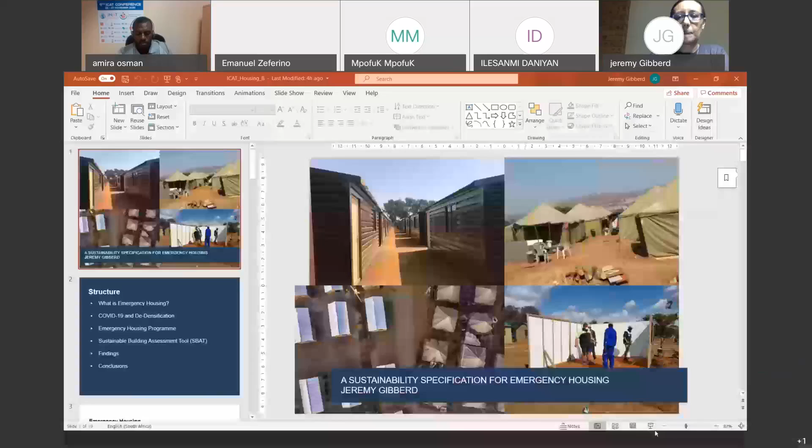Jeremy is muted, so we also need to unmute Jeremy. Jeremy, may I ask, you are presenter, you should be able to unmute yourself when you want to speak. Okay, so Jeremy, please unmute yourself. Apparently you can do that. And then for each of the speakers, please give us a bit of a background to yourself before you start. Okay, thank you. Can you hear me? Very clearly. Okay, and can you see the screen? Yes, we can. You can put it, you can, sorry, you can play your slides or put it on full screen. Wonderful, that's excellent. Okay, thank you.

My name's Jeremy Gibberd, and I'm an architect and have done work in sustainable built environments. So what I'm going to cover in the first paper is really a specification for emergency housing. It's quite a hot topic at the moment with the COVID pandemic.

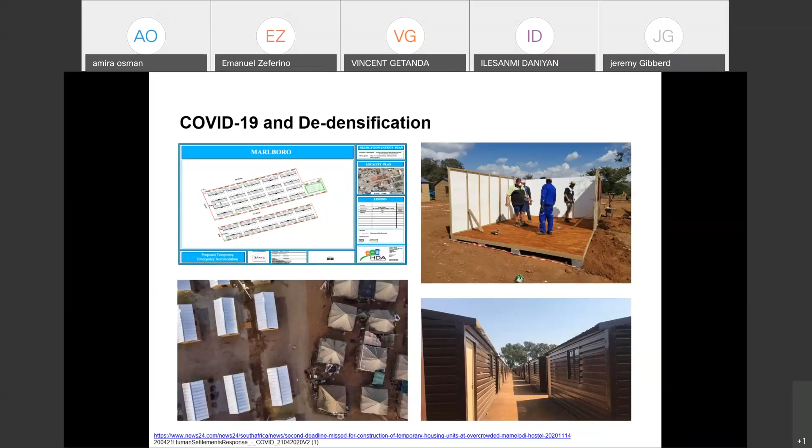They often consist of either tents or timber structures, and they are meant to be fairly rapid. They're meant to have been constructed in a month or two months. A number of them are still going on currently.

What is interesting is really the kind of response that has happened from a number of different areas. These are some of the points that have come through from NGOs, think tanks within the area, really saying that de-densification may not work. There's a number of issues in terms of people reoccupying the space that's been released. Also a major issue is that if you move people from where they're linked into other people, work opportunities, social cohesion, that can lead to a worse situation.

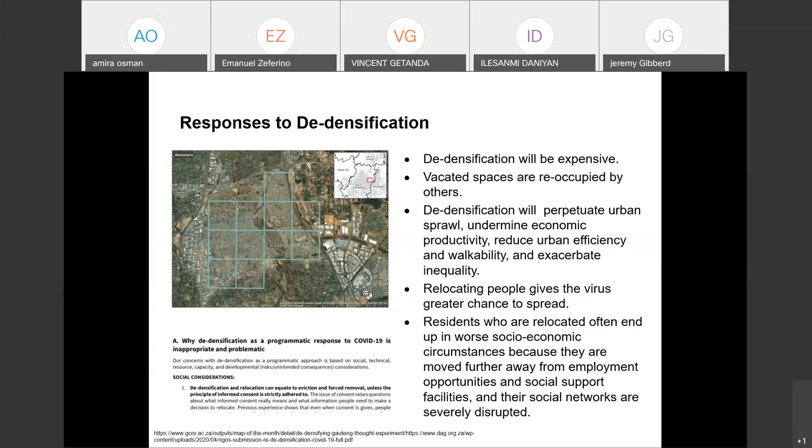And really that's one of the things that this paper looks at. So I'm not going to go into the detail, you can read the paper, but the emergency housing program is part 3 of the housing code, developed in 2009, so it's about 10, 11 years old. And it talks really about what are the types of provision that should be allowed for emergency housing.

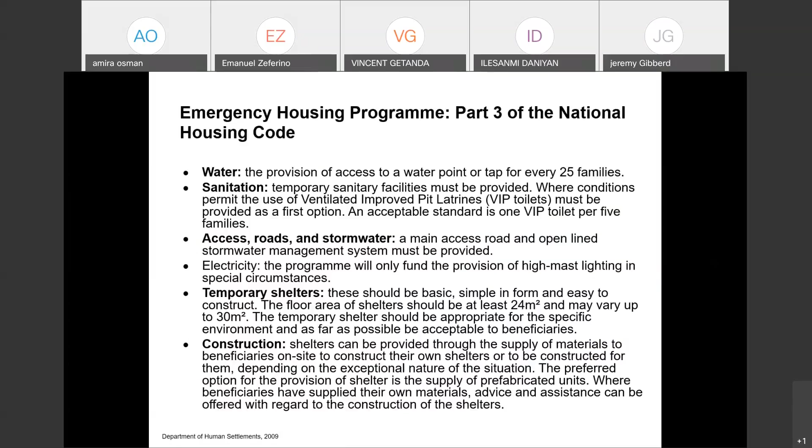So it covers things like water, sanitation, access, temporary shelters, construction, what the roof covering should be, the side coverings, footings, floorings, thermal efficiency, settlement densities. And it's not very detailed. I mean, you can see thermal efficiency, it's fairly generic, it doesn't get into quantitative detail. There's very limited performance specifications.

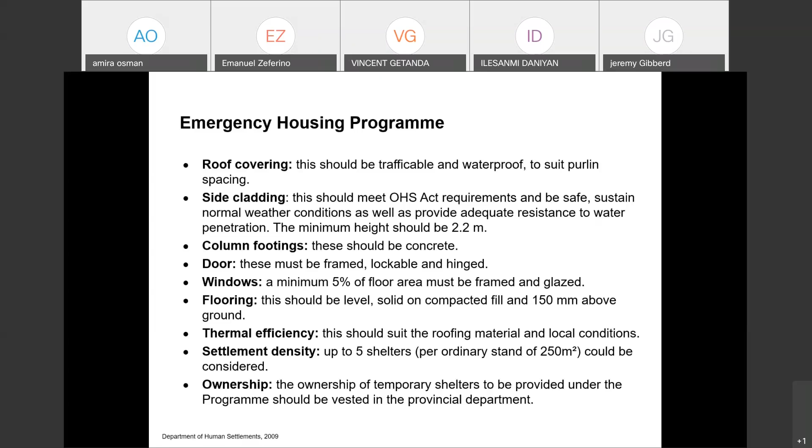And the danger with that, obviously, is you then go to the absolute minimum. And that's, I think, why some of the current programs have been criticized - the criticisms have been that they are going too low, that they are not really places that people would want to live in for up to 2-3 years.

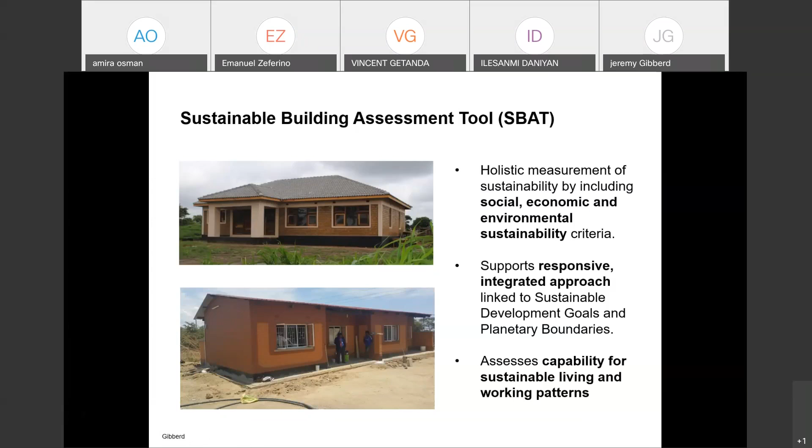So moving on, the tool that I used really to evaluate that provision is the SBAT, which is a tool I developed a number of years ago. And it's been used quite widely in a number of different projects to evaluate housing. So these particular examples are from Zambia. And it's been fairly instrumental in trying to really look at the sustainability in terms of things like local economy, local content, etc.

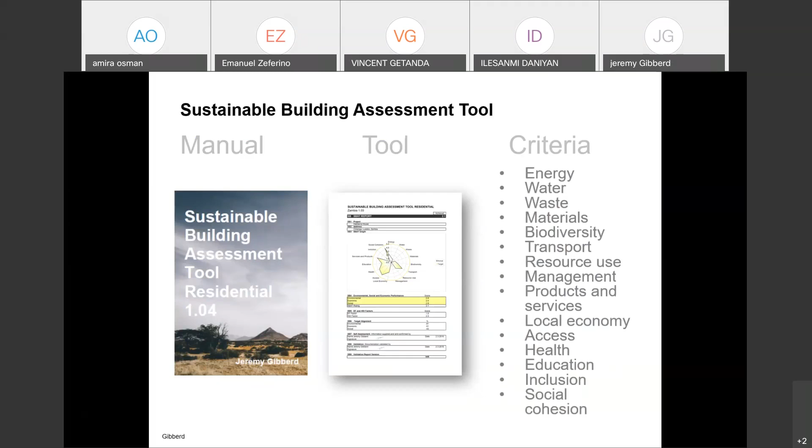And the way it works is that there's a set of criteria - 15 criteria, 5 environmental, 5 social, 5 economic - and you measure housing performance against that, and you get a web diagram and a score out of 5. So you have a good representative, quantitative measure of the performance of the design or the actual finished building.

So when I applied the SBAT, there's quite a lot of detail. Again, in the paper, I'm not going to go through a lot of this, but what comes through very strongly is that the current specifications are very limited in detail. So they don't really address the issue of what happens in the building in terms of energy.

And obviously, if there's a family there that's living 2 or 3 years, how do they cook? How do they light the building? The same thing for water and washing - what happens, where are the washing areas, how does that happen? Waste, there's no mention of that.

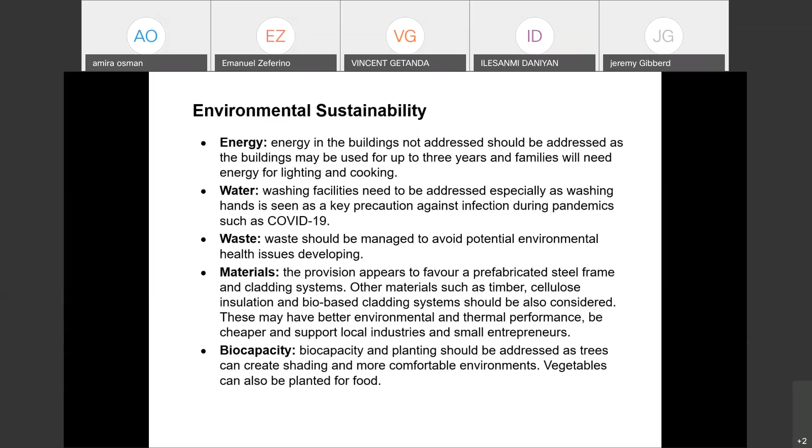Materials, again, it talks about a prefabricated steel frame. Increasingly, there are a whole range of other building technologies that could be used. And biocapacity, there's no kind of mention about how you make the site more comfortable in terms of environmental issues.

So economic sustainability, again, the location really isn't addressed. And what the research shows is that it's very important to link emergency housing with the existing and previous communities so that the links are still strong. People can work where they worked before. And how you address local economy so that perhaps the building of those structures could be done by people within that community or the displaced people, so there's some way of earning a bit of revenue and really getting back on your feet.

Social sustainability, again, one of the key issues here is that the provision doesn't really mention a lot of the kind of social infrastructure that you'd expect in a community - things like health, education, social cohesion. So again, it's important, I think, to address that so that you don't get the situation where you move people 50 kilometers from a lot of the networks and support that they used to have, and records, etc.

So basically what the paper then does is it says, given that situation, what are the aspects that could be modified or added to in terms of a specification.

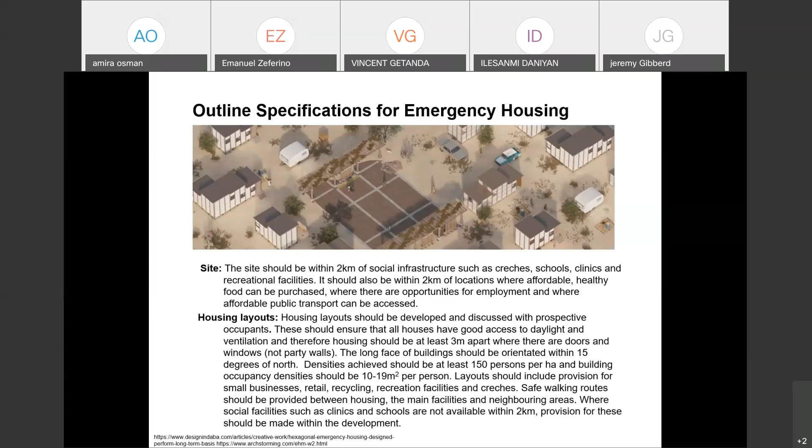So there's some detail in the paper around where the site is, layouts, detail on water, sanitation, electricity, what's a simple, workable, sustainable electricity system for emergency housing so that life can carry on, children can study at night, etc. A little bit on the detail, and there's some very interesting examples.

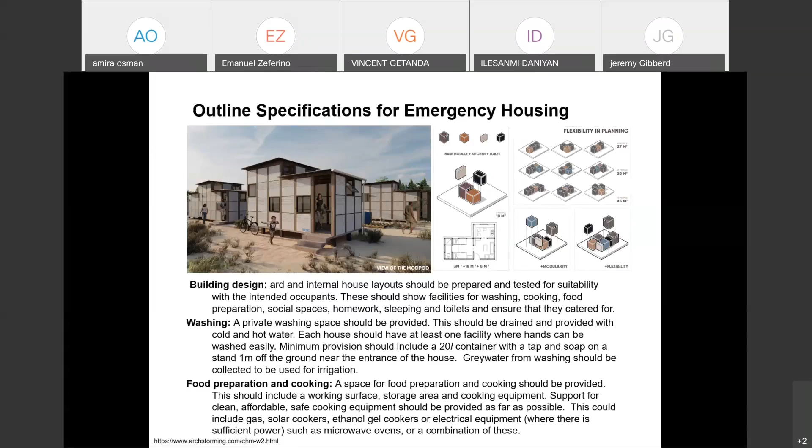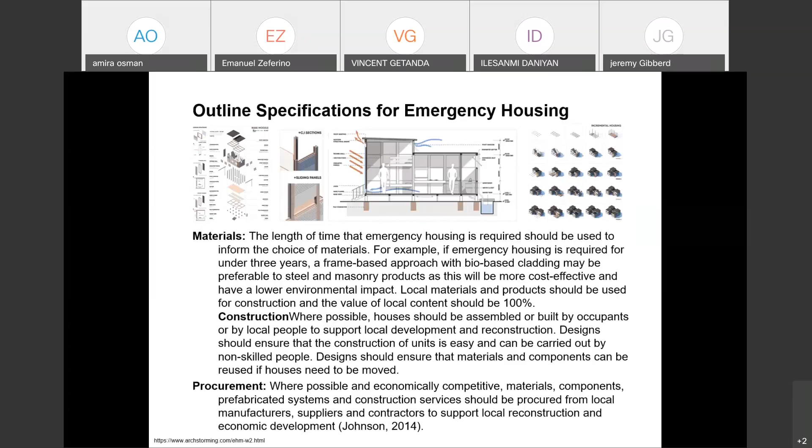So again, the specification goes into a little bit of detail for that - the types of materials, the construction. Increasingly there's some very good bio-based materials that have very low embodied energy, can be produced locally, can create new entrepreneurs, new jobs. And looking at procurement - how do you procure locally so that you support the local economy and enterprises that have been impacted by the particular issue that has displaced people.

So really coming to the end so that there's a bit of time for questions and discussion. So basically what the study does is it reviews the existing provisions for emergency housing in the Department of Human Settlements.

And those provisions are fairly minimal. I think if there was a lot of capacity in provinces and in municipalities, that wouldn't be so bad, because they may have their own locally developed versions which they could then implement. The thing is that isn't the case in many municipalities and provincial departments - they tend to use the overarching specifications, and there's not much time really to put together new tenders, new specifications, good layouts, etc.

So the argument this paper makes is that we need to put together more detail. We need to supplement the existing, and we need to update the existing so that we really address how people live in emergency housing and how can we make sure that it's as sustainable as possible. And that really is the purpose of one of the outputs, which is the outline specifications for emergency housing, and I think it presents a reasonable start.

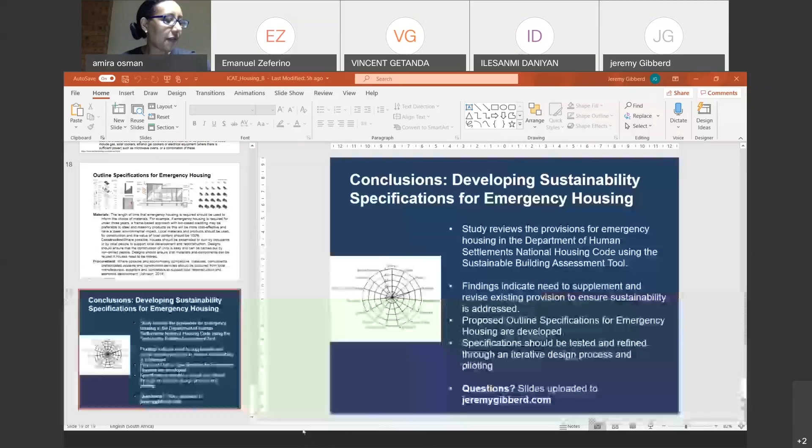This issue of de-densification - for myself, as someone that has advocated for and very much been an activist for density for a lot of my career, this discussion about de-densification since COVID started, I haven't quite known how to go about addressing that. So this is a very interesting topic you're working on. But also, what you refer to as absolute minimum guidelines - these aren't really ensuring anything of quality or anything that would be viable in the long term. Perhaps you could tell us, is the intention that people would settle there for 2 or 3 years and then it develops into a proper settlement, or is the idea that they move on somewhere else?

Okay, thank you. I think we don't know, because there are settlements that you go and look at in all countries. There are places in the UK where people were meant to have been there 6 months, and 10 years later they're still there. And there are many in South Africa. So I think the issue is we don't really know.

But what we do know is that people that have been affected by a major disaster, something like flooding, it's very important that we enable them to put their lives back together and get going again. And I think what that means is there has to be some minimum standards that take into account how they live, how children go to school, where people work, how people cook, where they wash, etc. We can't just say, you know, there's a shed, you go and put your life together.

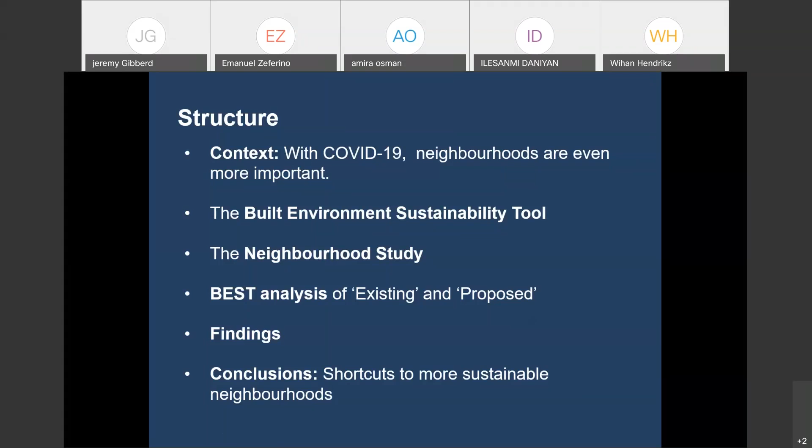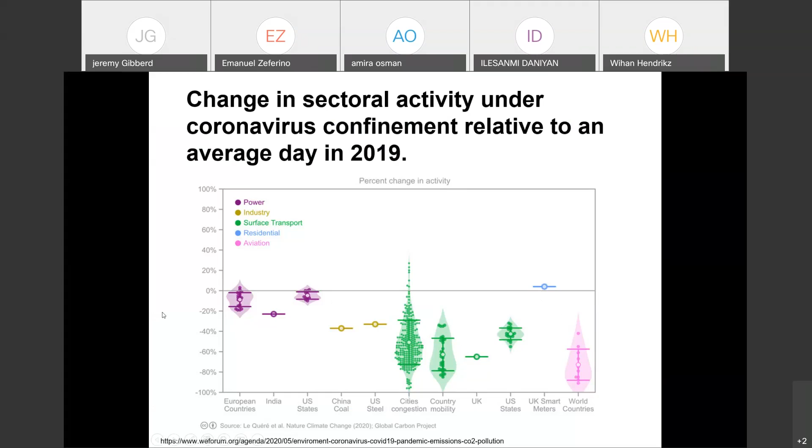First, an interesting issue from the pandemic is the reduction in carbon emissions. There's been a huge reduction in surface transport, aviation fuel, power consumption, etc. Because people stayed home and became more local, we actually have a far more efficient set of measures when we look at carbon emissions. It's very interesting data.

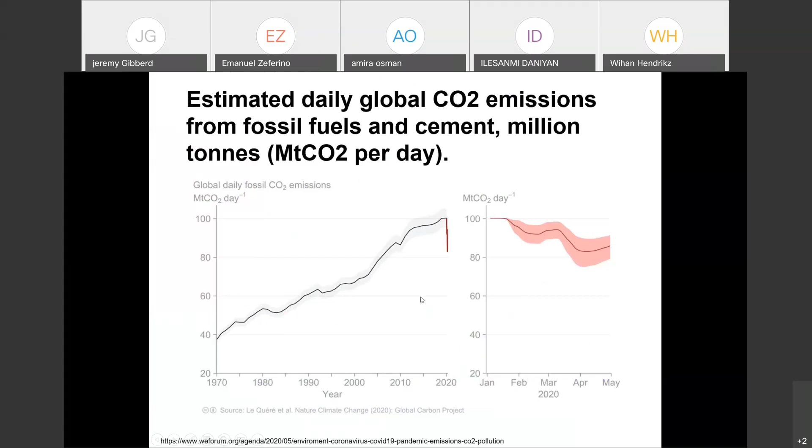You can see this clearly in global daily carbon emissions—that's where we were at the beginning of 2020, and we almost dropped 20%. That's a graph over the months, and what it shows is that it is possible. It makes a very strong argument for localization, local living, local working. That's really the essence of the paper.

Unfortunately, it also shows there's likely to be a major impact on poverty. There was good progress downward over the last 10 years, but the pandemic's effect is that it's likely to increase. There's a huge increase in pressure in terms of jobs, education, health, etc. So how do we address this at a neighborhood level?

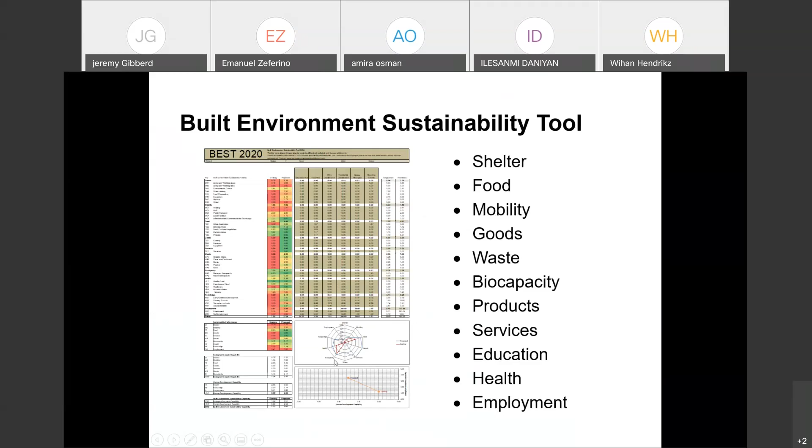The idea is you measure where you are, then define interventions to achieve full capability for sustainability—a neighborhood that is fully sustainable across these criteria would fill the whole chart. It's quite an interesting tool, and nicely, it's very well aligned with the SDGs—if you take the 17 SDGs and compare them to the tool's criteria, there's very strong alignment.

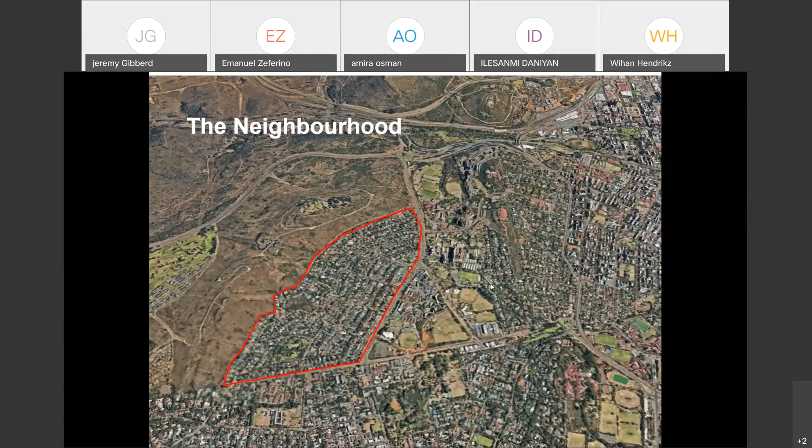The neighborhood, which many of you may recognize as I go through it, is outlined in red—fairly well defined, with hills on one side, a highway on two sides, and some social infrastructure around it. It's a fairly typical wealthy Pretoria neighborhood with quite large houses, swimming pools, etc. One corner has interesting commercial development—shops, restaurants, offices. You can see the corners and edges of the neighborhood becoming commercialized, with densification starting, more jobs and businesses being created because it's in a very good location.

The first exercise was to assess the neighborhood against these criteria based on current development types. Using the tool, we measured different areas and found insufficient density, limited renewable energy, limited passive environmental control, and limited provision for mobility—it's not a safe place to walk or cycle since there's no specific provision. There's also limited access to low ecological footprint products, and limited services.

So if you want to do things like banking, some types of banking, you've got to travel. Obviously there's the use of the internet, so there's some provision locally. In terms of employment density, it's low, not much support for local enterprises. There's no schools locally, no secondary schools, primary schools, etc. Health, there's some facilities for exercise, but very limited facilities for things like clinics.

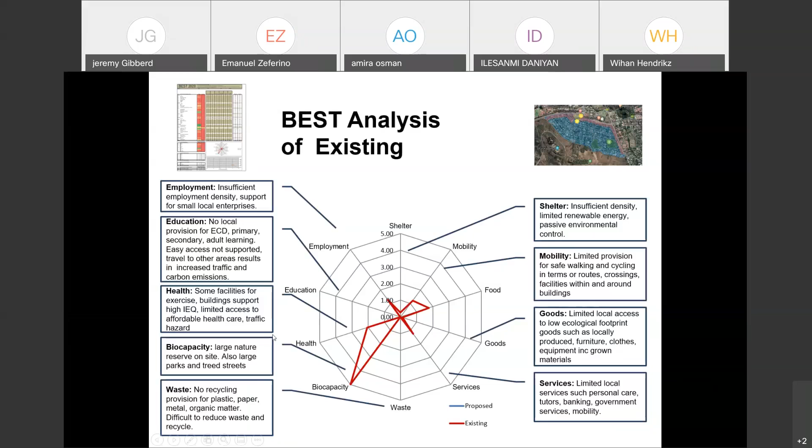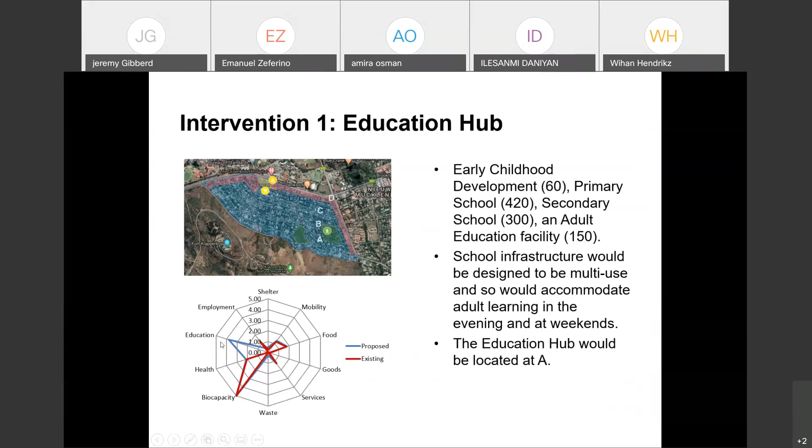And what we then proposed is 6 different interventions. We said, what if we put in an education hub with early childhood development, so a creche, a primary school, combined primary and secondary school, and a facility that could be used for adult education, making it multi-use so it could be used for lots of different facilities. And what you can see is that improved the score in that area, as you'd expect.

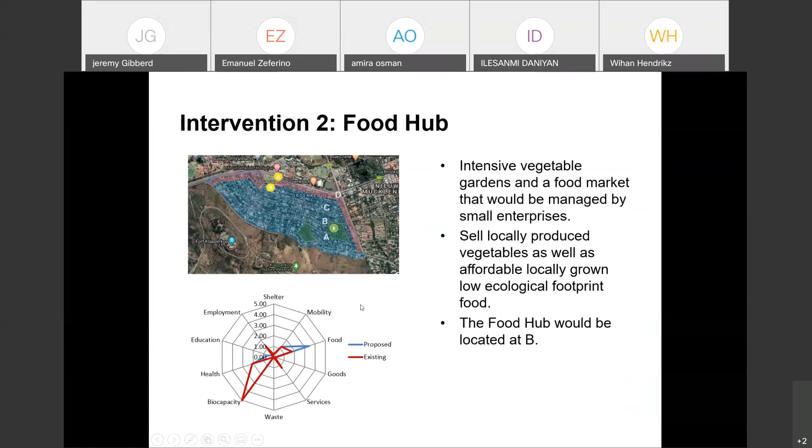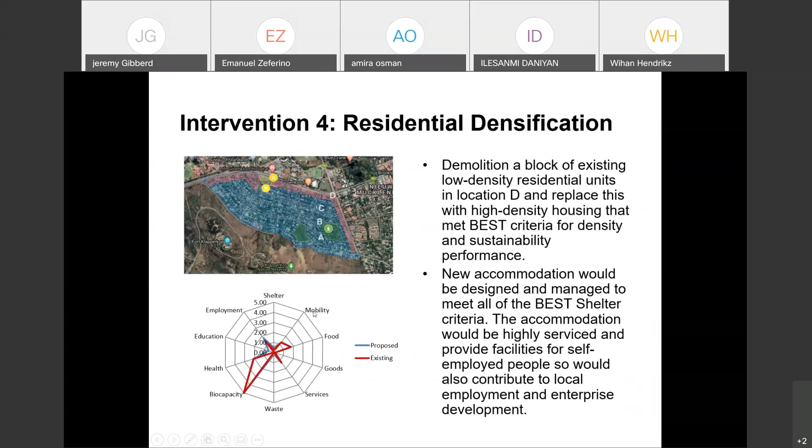Residential densification again took out a block of residential and increased the densities to meet sustainability density requirements. And again, some aspects were improved.

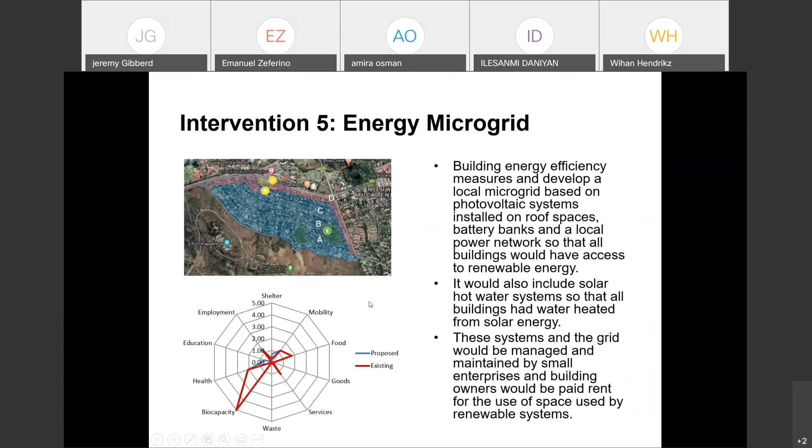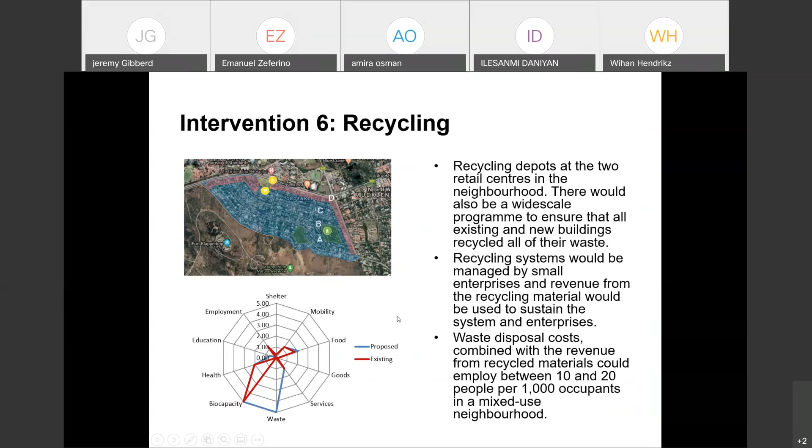Recycling - this was about setting up a local recycling scheme and recycling pretty much 100% of the waste on site, linking it up to recycling contractors. So again, as you'd expect, a major improvement in terms of waste.

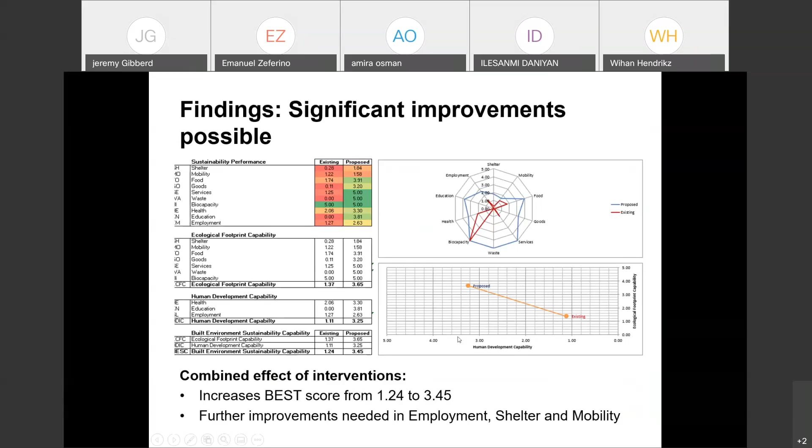If we put that all together, taking the 6 interventions, we'd improve the BEST score from 1.24, which was very low, up to about 3.45. We improve both ecological footprint, which is really the impacts in terms of consumption and production, and also human development capability - better access to jobs, better access to education, health. So the nature of these particular interventions seems to work quite well for both the social and economic.

Okay, I'm just about finished.

So just to summarize, so there's a bit of time for questions - what can we learn from this study? The findings suggest the following key issues. The first thing is that if we design interventions to really address everyday requirements - we need to access goods, we need to access services every day for normal life - and if we can create a lot of those locally, we have many knock-on advantages. We can create local economic activity, local employment, and reduce the requirement for travel, cars, carbon emissions.

The second one is that if we can think through how the development works, if we can proactively structure the development through conditional requirements - so we state that a development needs to include X and Y in order to meet and address a gap in that neighborhood - we can make a big difference quickly.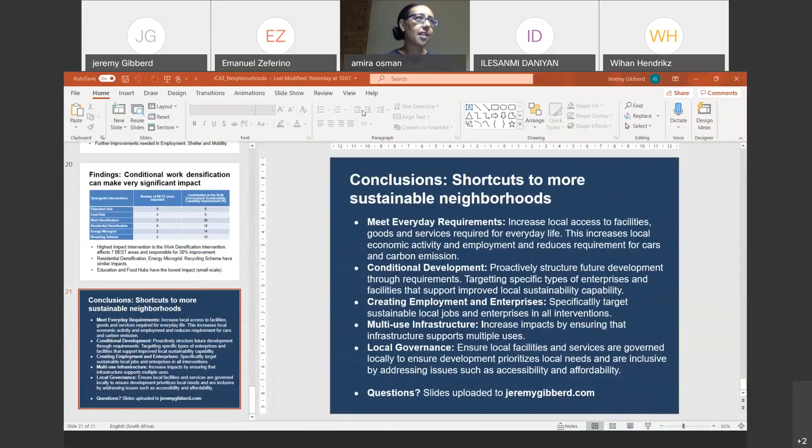I think that's it, thank you so much Jeremy. I really hate to interrupt anyone, especially when the topic interests me so much, so please forgive me for that. But for the other speakers, let's try to stick to the 12 minutes. I really enjoy what you're trying to do, Jeremy, taking concepts in policy documents, various agendas and so on, and making it measurable. I have some questions, but I'll keep them for the end. I see another question about the commercial viability and worldwide applications of this. Jeremy, I'm going to keep track of these questions, and I'll definitely be referring to this for my own work on spatial transformation, so I have a lot to say about it. But let's move on to our next speaker. Emanuel, if you can help our next speaker, we will get back to having a conversation at the end.

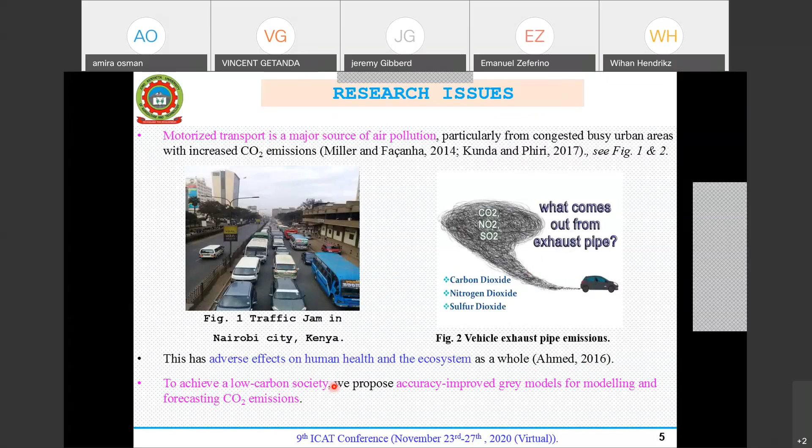Our research issues are: motorized transport is a major source of air pollution, as we can see from figure 1, which is traffic congestion in Nairobi City, Kenya, resulting in CO2 emission, as shown in figure 2. This has adverse effects on human health and the ecosystem as a whole, as given by Ahmed 2016. To achieve a low carbon society, we propose accuracy improved gray models for modeling and forecasting CO2 emissions.

Rationale and research theme. Our rationale is, as populations and economies of the world continue to grow, it is a challenge to handle CO2 emissions and global warming. This calls for modeling and forecasting of CO2 emission to generate high quality and accurate CO2 emission data for aiding planners to set policies and measures to mitigate environmental pollution.

Our aims include: first, to improve the accuracy of the original gray model by data grouping technique and modification of initial condition. Second, to model and forecast CO2 emission by these improved gray models.

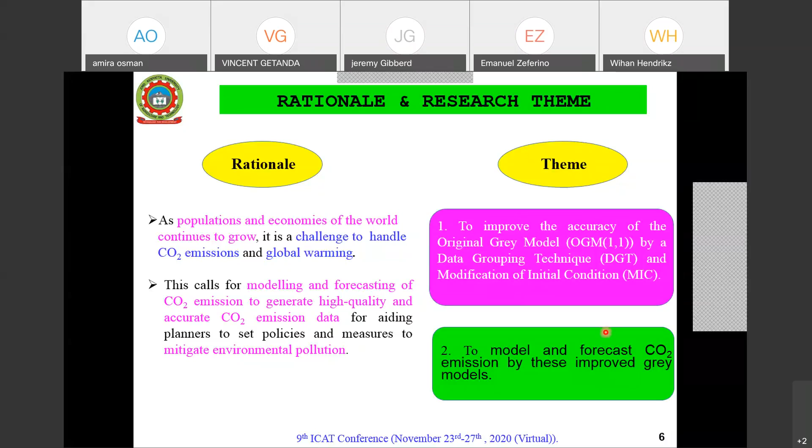Literature review. The gray system theory was introduced in 1982 by Deng, as given by Deng 1989. The term gray means poor, incomplete, and uncertain. It has been applied in various fields such as ecology, economy, among others, to analyze, estimate, forecast, and model gray systems.

GM's accuracy improvement in the past has been based on optimizing the initial condition, modification of the background value, as given by Madi and Mohammed 2017, and improved error as given by Jiang Jun et al. 2011.

In our research, we introduce a new approach, that is the data grouping technique, and compare it with optimization of the initial condition in improving GM's forecasting accuracy.

In the past, CO2 emissions has been predicted and forecasted based on multiple linear regression analysis as given by Lipao et al. 2017, and the co-integration approach by Lee et al. 2018, and autoregressive integrated moving average as given by Nyoni and Mutongi 2019. These methods are complex in their analysis and require huge amounts of data to forecast CO2 emissions.

Thus, we propose a simple and less data requiring approach in modeling and forecasting CO2 emissions. This is the GM, that's the gray model, whose accuracy is improved in this paper by data grouping technique and modified initial condition. Research purpose and approach.

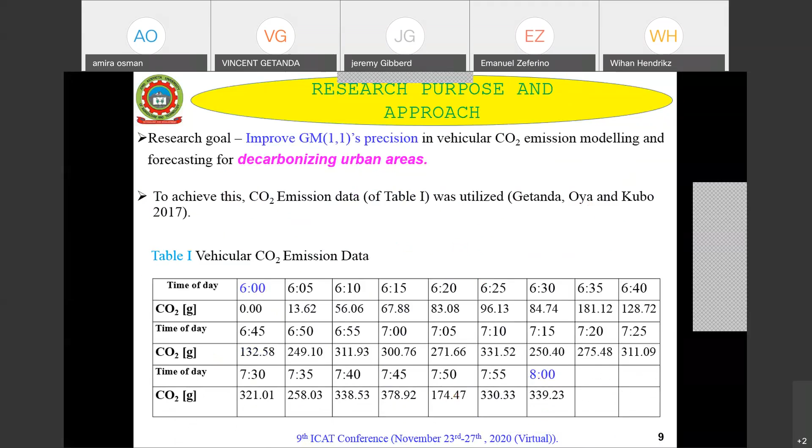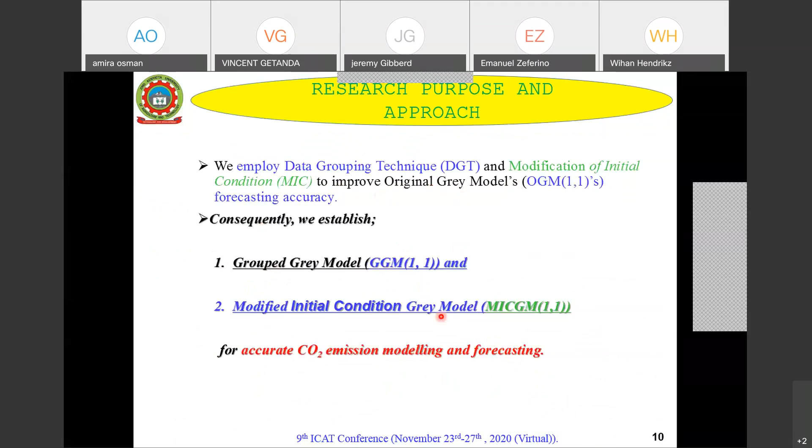And this is our Table 1, which consists of data from 6 a.m. to 8 a.m. of the day and a total of 25 data points. We employ data grouping technique and modification of the initial condition to improve the original gray model's forecasting accuracy. Consequently, we established grouped gray model denoted as GGM and modified initial condition gray model given as MIC-GM.

The gray model, let's review the gray model, is a single variable first order differential equation based on gray system theory, and it consists of accumulated generating operation, AGO, inverse accumulated generating operation, IAGO, and mean value generating operation, MGO.

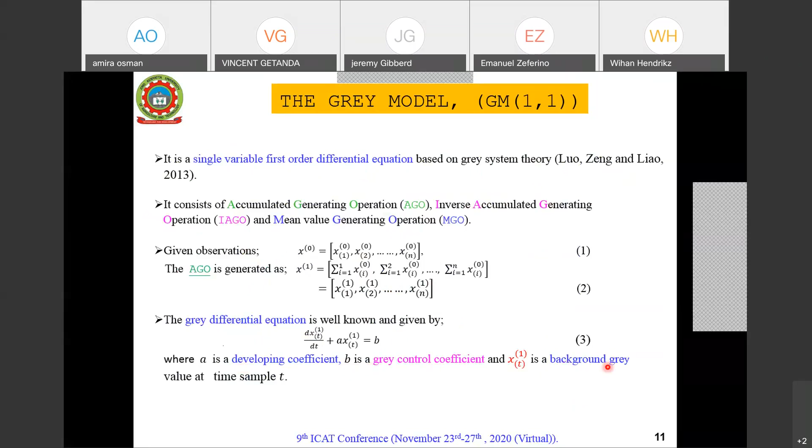For example, given observations as in equation 1, the AGO is generated by equation 2, and the gray differential equation is well known and given by equation 3, where A is developing coefficient, B is gray control coefficient, and X1 of T is background gray value at time sample T.

Equation 3 has a well-known solution given by equation 4. Therefore, the predicted value based on AGO series is given by equation 5.

From equation 5, the IAGO is generated as in equation 6, where x hat 0 of k plus 1 is the predicted value of x0 of equation 1. And from equations 1 and 2, we have the gray differential model given by equation 7.

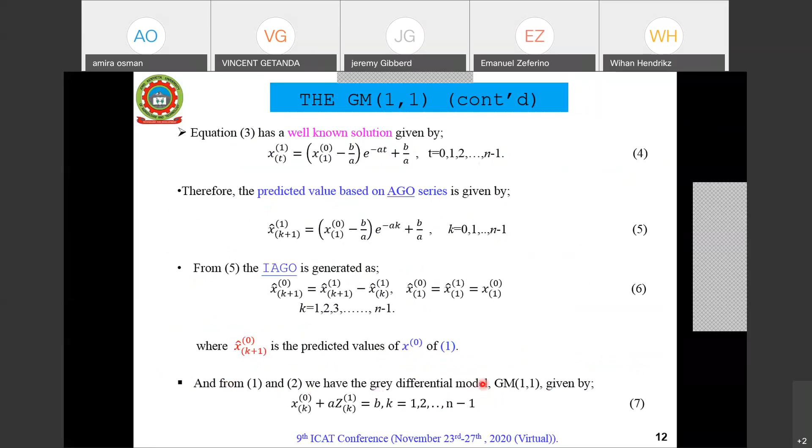Now, our proposed techniques for improving the gray model's precision. First, we proposed the data grouping technique, and in this paper we adopted the strong grouping technique because it is the most accurate technique, as given by Getanda, Oya, and Kubo 2017.

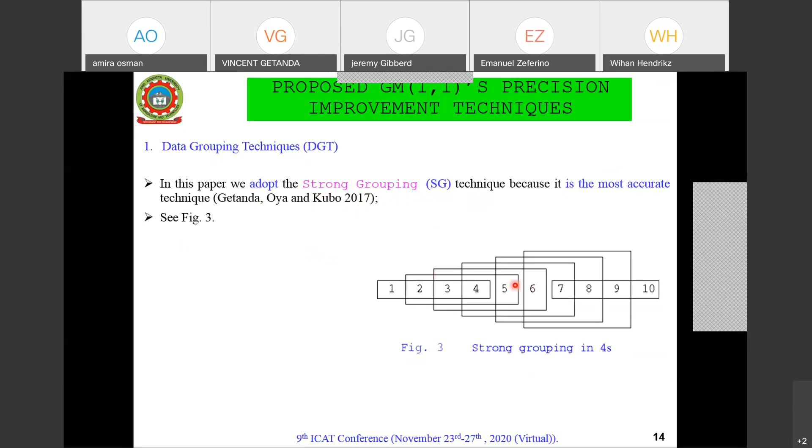As shown in figure 3, we show how we group 10 data points in groups of 4, and as we have just said, grouping in 4s is the most accurate grouping.

Secondly, we use the modification of the initial condition, as given in Madhi and Mohamed 2017. From equation 6, the restored value of the original gray model sequence can be given by equation 11. And substituting equation 5 in 11, we obtain equation 12.

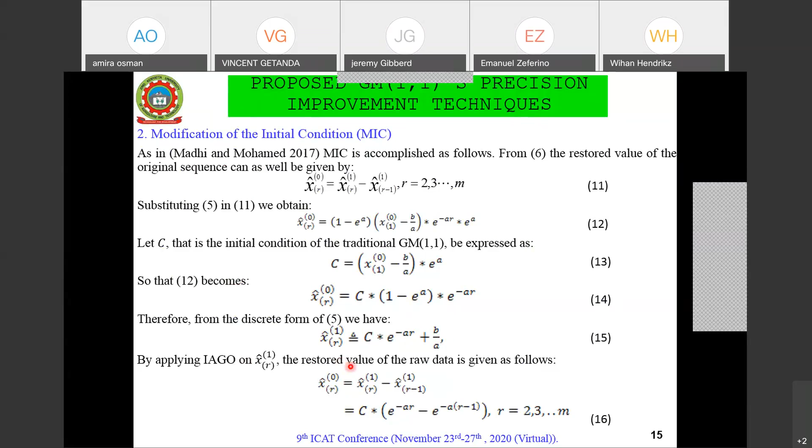Letting C, the initial condition of the original gray model, be expressed by equation 13, equation 12 becomes equation 14, and therefore from the discrete form of equation 5 we have equation 15. By applying IAGO equation 15, the restored value of the raw data is given by equation 16.

Minimizing the sum of the squared error from the predicted, that is the restored values, we can optimize the initial condition. Therefore, a function C is constructed as in equation 17. Substituting equation 16 in 17 and differentiating it with respect to C, letting the derivative equal 0, the optimized C is given by equation 18.

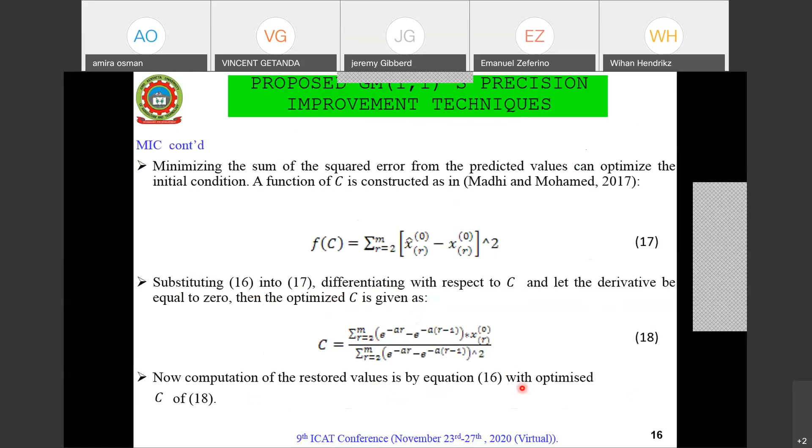Now, computation of the restored values is by equation 16 with optimized C of equation 18. Measuring accuracy improvement: we measured our accuracy improvement in the GM's model by mean absolute error and mean absolute percentage deviation, error indicators given by equations 19 and 20.

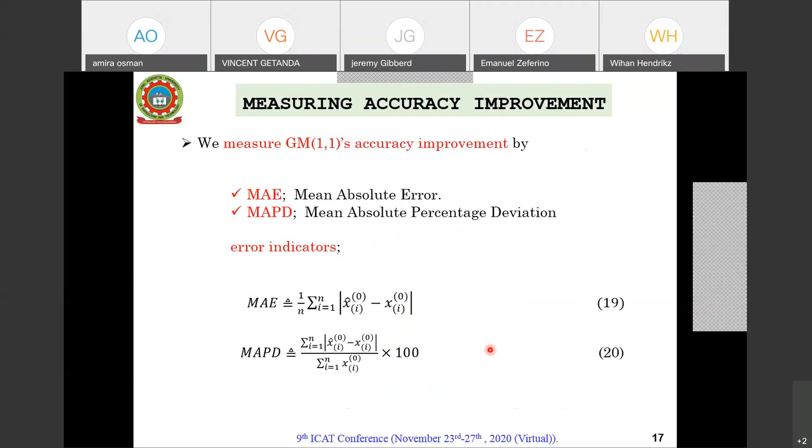Modeling and forecasting data sets. We subdivided the CO2 emissions data of table 1 into a modeling data set for estimating.

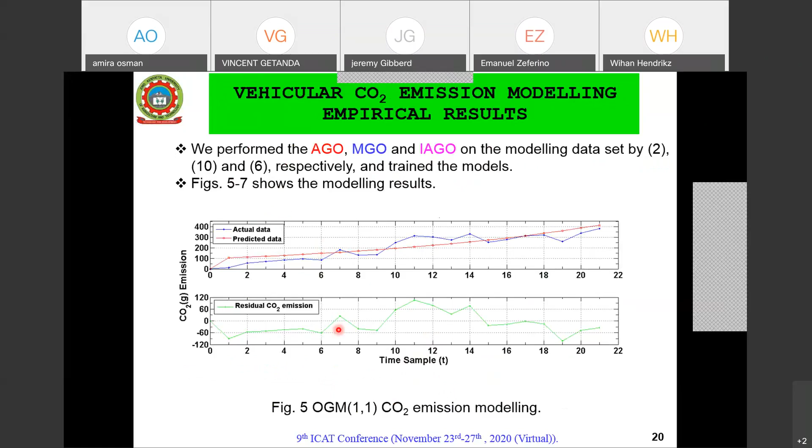Figure 5 shows the results for CO2 emission by the original gray model. The first 2 curves are actual and predicted data. Their difference, that is the error, is shown as the residue CO2 emission curve.

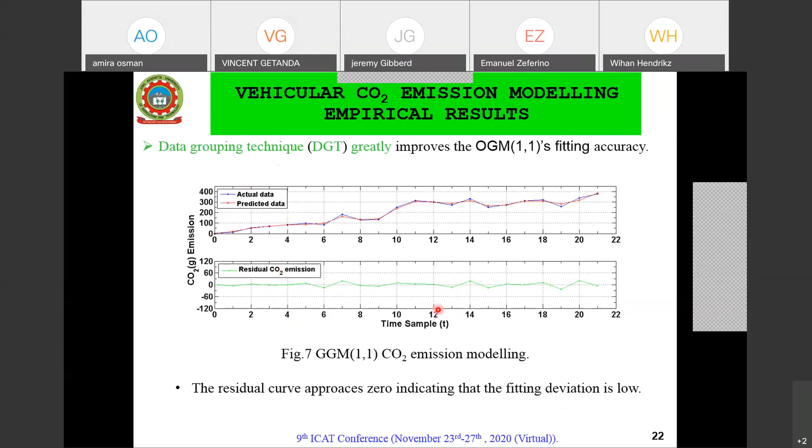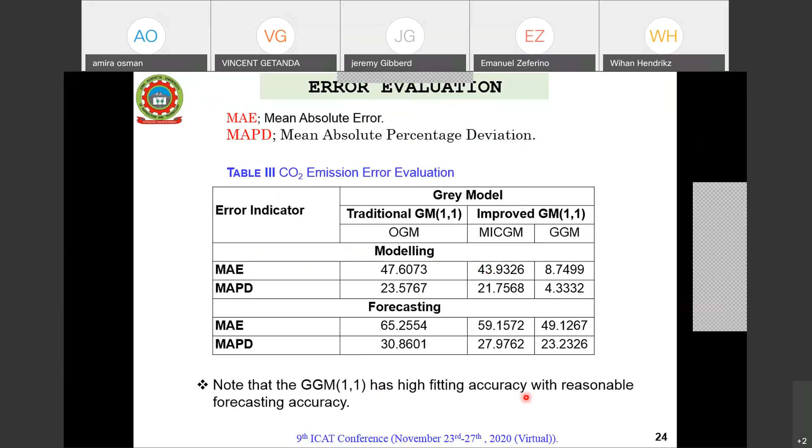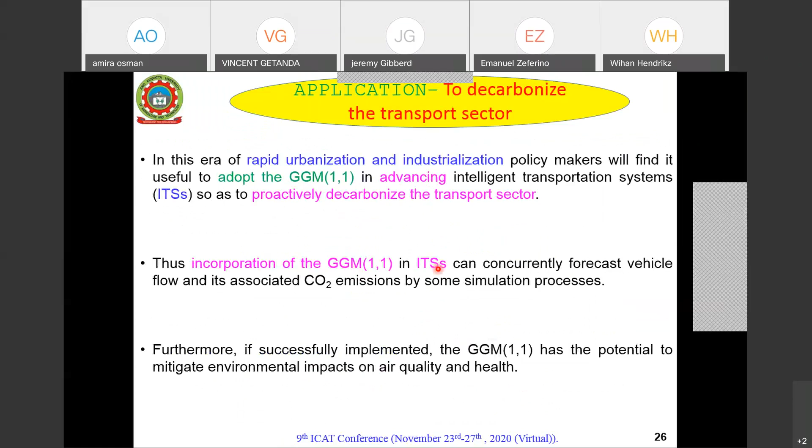In conclusion, we have modified the original gray model for forecasting, and we have created 2 models, MIC and GGM, which can find application in decarbonizing road transport by incorporating the GGM into intelligent transportation systems. Finally, these are our references, and I wish to thank you so much for your attention.

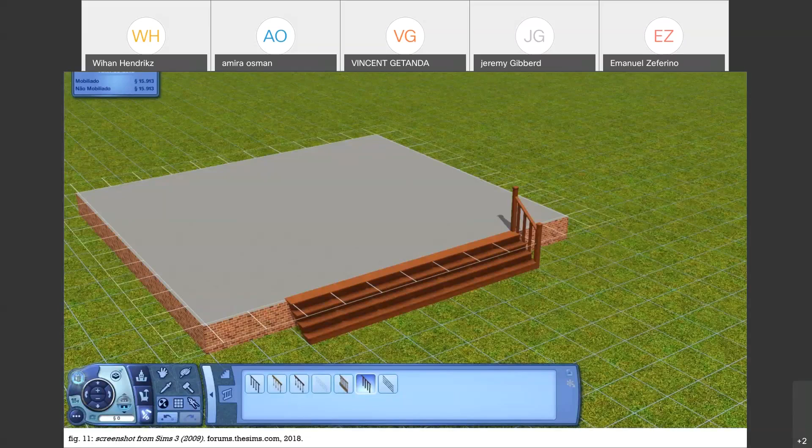Coincidentally, this is The Sims, a popular computer game, and it effectively exemplifies everything that the design method movement went for. It's a simple tool for laypersons to use and design whatever they want, but it also has its flaws. It's very rudimentary and restrictive, and even a good designer will struggle to create good architecture within this tool, which ultimately led to the failure of this movement because clients really struggle to translate what they want into good architecture.

This brings us to a curator-architect kind of relationship, where the creative authority is shared between the architect and the client. To do this, we need to address two fundamental flaws that occur within the project. The first is a failure of communication between the client and the architect, which goes much deeper than just not sending emails. The other is a skewed authority between the two actors.

Between failure to express and skewed authority, we have an issue in terms of how the creative authority is then shared between the two.

We have defined the client as being the holder of self-knowledge, but what we find is that the ability of a client to actually express themselves is marred, because quite often words really do fail when you want to express your wants or your needs or your expectations about something.

That is exacerbated in the presence of a skewed authority, where the architect has the technical authority and technical expertise, and the client is kind of funder. These two create two poles of authority within the relationship, but they don't really negate each other, it just creates quite a strained relationship.

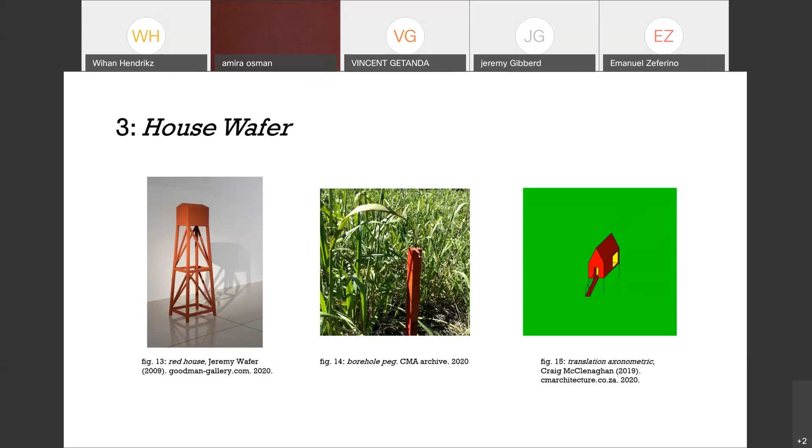Because of the increased understanding between the architect and the client, better architecture is created and the architecture is better appreciated. What is key about such a process is making it meaningful in its own right. Where such a co-authorship relationship is made meaningful, the architecture also gains meaning, and the public's increased engagement in the architecture improves the value of good architecture, and so increases also the need of good architecture. Thank you.

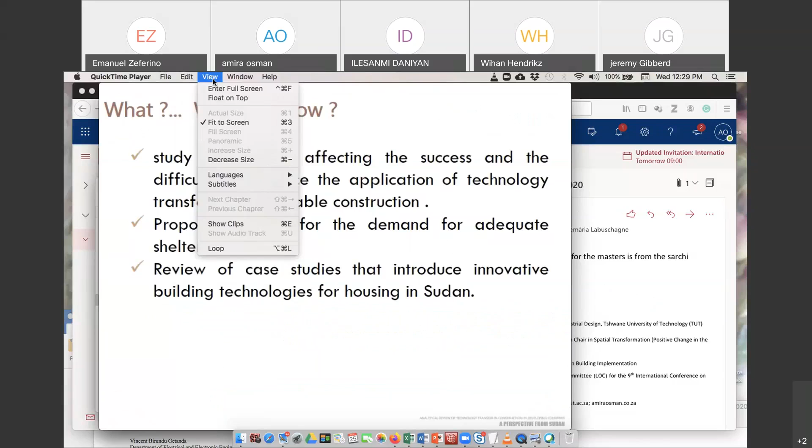So let's start. First of all, the main purpose of this presentation is to show the main factors that affect the success and the difficulties that face the application of technology transfer in the housing sector and the adoption of appropriate technologies for housing in general.

The main purpose of that is to try to propose some kind of guidelines or solutions to help in the adoption of technology transfer as a way of solving the problem of upgrading shelter for vulnerable people as the main focus of my research. This will be definitely first through the review of some case studies that I believe are providing some sort of good example of technology transfer in the adoption of building technologies and materials in the country of Sudan.

So these examples will help in solving some of the problems of the vulnerable people who are facing continuous problems due to the usage of materials that are not durable, that are not sustainable, that are not standing in front of the context of the country, or might not be responding well to the environmental and climatological context in general.

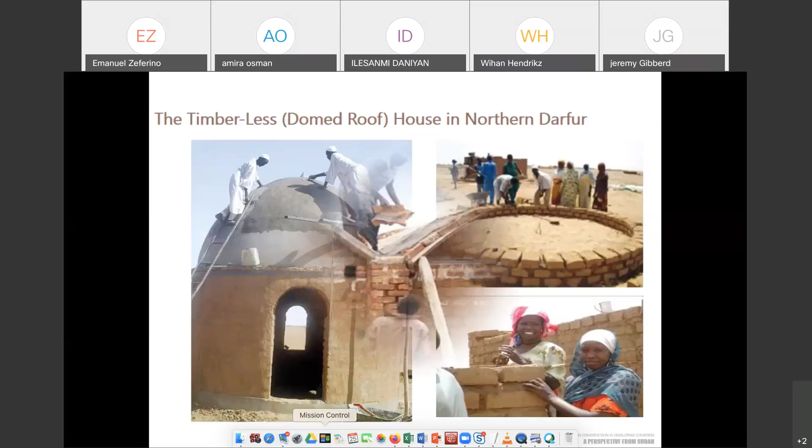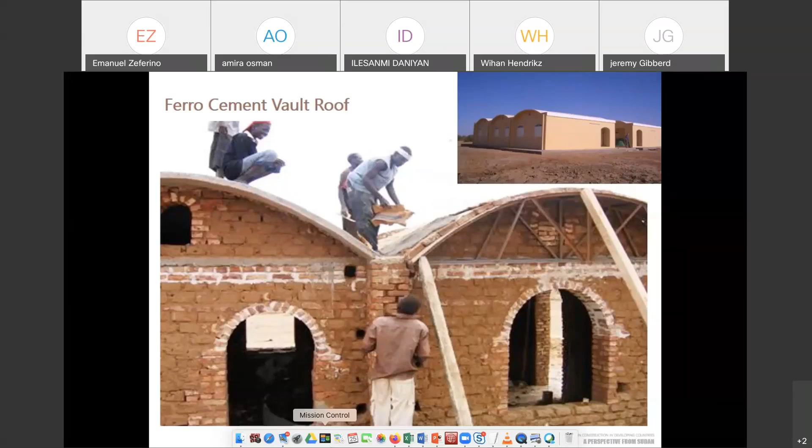Another example is the ferro cement roof, which has been introduced and adopted by many enablers for technologies, because roof is usually one of the challenges facing the construction industry in Sudan due to the high cost associated with durable materials like reinforced concrete or steel roofs. So ferro cement is believed to be one of the options that many actors believe will suit the country, and some projects were successful in introducing the technology, but dissemination remains a big challenge, and we will come to this later in this presentation.

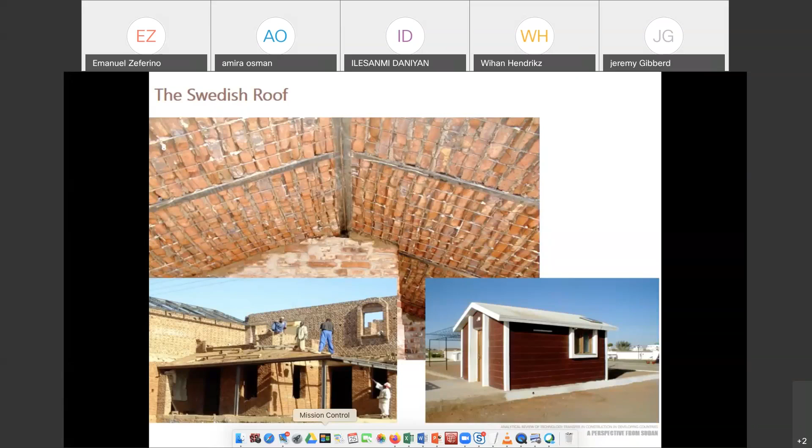Another example is the Swedish roof, which is based on the use of bricks on metal mesh. Due to the thermal properties of brick, it's believed that it works very well, and such a roof has higher potential in terms of thermal performance when compared to concrete or even ferro cement. However, due to the physical properties, it's not possible to use it for multi floors or higher loads, as its load-bearing capacity is not that high.

For the walls, there have been many materials introduced. One of them is the compressed soil blocks and the stabilized soil blocks, and an example of this is a school in Khartoum, which was built in the 80s as a pilot project for the introduction of compressed soil blocks. The project was funded by UN Habitat, and it was studied and applied by the Building and Road Research Institute and the University of Khartoum.

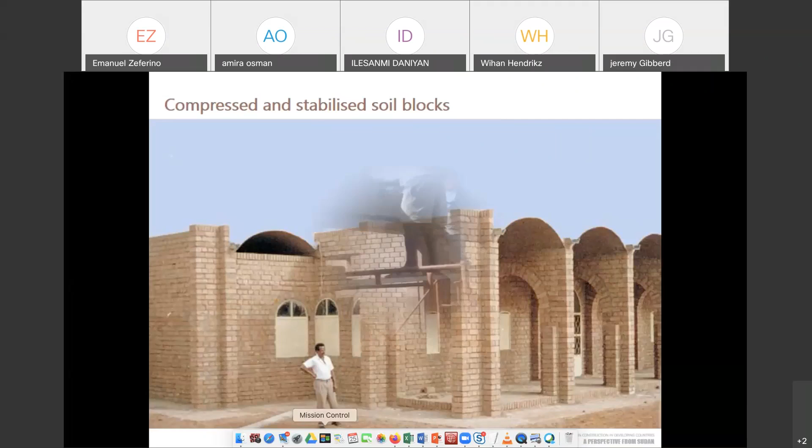And recently, stabilized soil blocks were introduced, specifically the interlocking stabilized soil blocks, which was produced from South Africa. This kind of technology doesn't need any sort of mortar - it's just by interlocking the blocks. So many projects were developed and introduced, like in Eastern Sudan, in Western Sudan, in Nyala, and so many places in Central Sudan as well.

So after reviewing some of these attempts, a question arises: were these examples effective in transferring the technologies or introducing them to be part of the construction industry in Sudan? And the simple answer is no. These technologies were very successful technically; however, it wasn't evident that they have been widely adopted in the country.

And if we really want to judge the successful transfer of the technology, we have to think about how people adopt it on a wider scale, and whether it's adapted to the current conditions of the country or the context in which it's applied. So many of these technologies remain in the scope of pilot projects, but they're not widely adopted in the industry.

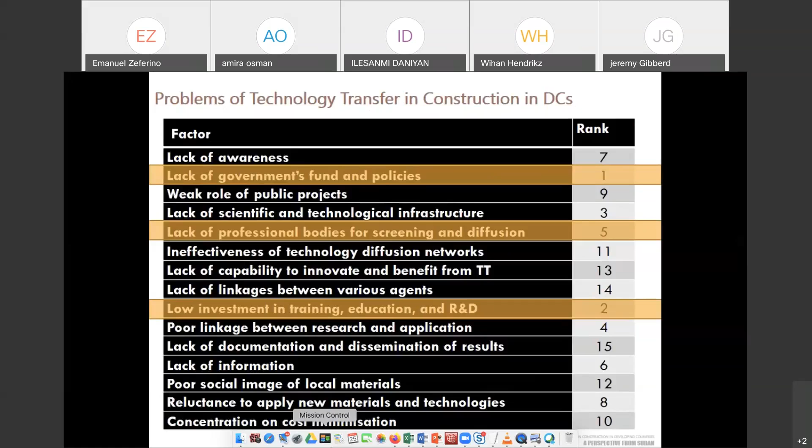Followed by that is also the lack of scientific and technological infrastructure, and lack of professional bodies that might help in the screening and diffusion of technologies, along with the assessment of these technologies.

Based on that, we tried to develop a model that shows the interrelationship between these factors, and to some extent the causality relationship between them. We divided them into 5 levels, starting from the primary variables and ending with the end result, which is the ineffective way of transferring the technology. The higher the parameters, the stronger the relationship is.

We believe that by studying these factors further, we could develop recommendations that will help in the adoption of technology transfer as a way of solving housing problems in the country, along with the construction industry in general. On top of these recommendations is the establishment of a central agency that will help with screening, testing, and evaluating new technologies believed to be useful or applicable.

Yet institutional support is needed, so this is one of the steps that could be done through the government: to establish criteria to determine the most appropriate technologies and to help assess and judge these technologies.

And to support the research centers and higher education institutes through collaborative research that will help in the dissemination of knowledge and the diffusion of successful technologies.

This is a very quick review of the paper content and the topic we tried to present in our paper. I hope you have enjoyed the presentation, and thank you for listening and for your time. Thank you.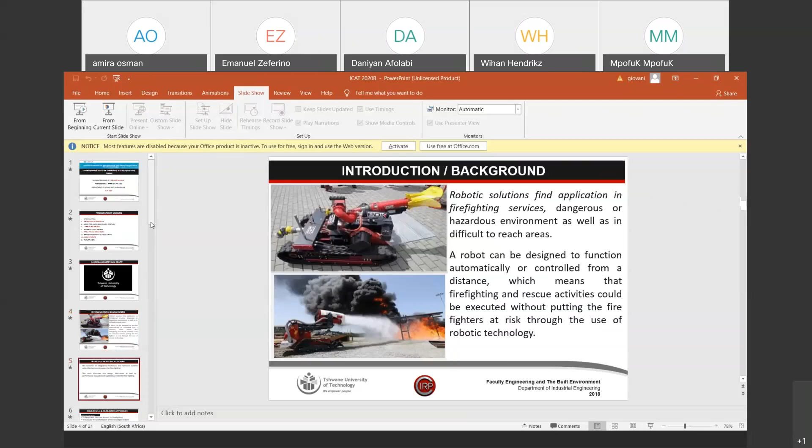Now to the background of the study: the need for an integrated system of mechanical and electrical components with an effective control system for firefighting brought about this particular work, and the work discusses the design, fabrication, as well as performance evaluation of a prototype robot for firefighting.

So the objective is to design and fabricate a robot for firefighting and to evaluate its performance. Carry out some literature review and a feasibility study, and from there, design, having identified the design requirements, assembly, as well as the performance evaluation of the work was carried out.

Robotic solutions find useful application in dangerous and hazardous environments, as well as difficult to reach areas. Therefore, firefighting operation is important. It's an important but dangerous service, which can result in destruction of properties, permanent disability, as well as death of personnel if not efficiently deployed. However, the associated risk can be mitigated with the development of a robot with suitable capabilities for firefighting operation.

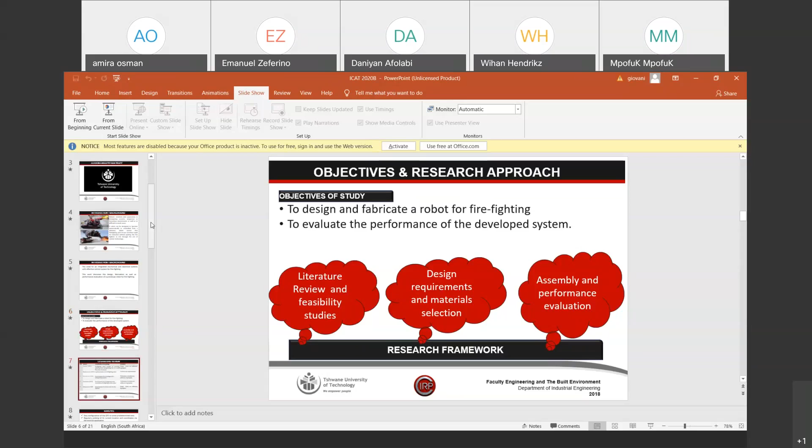Some of the design requirements for this work speak to the fact that the robot must be able to provide quick and emergency response with the ability to get to the scene of the fire and extinguish it quickly. Since technology now allows for more efficient and effective means of firefighting, robots can be employed with the use of a microcontroller designed to accept inputs from a set of electric signals and give output in response to the programmed command. This literature survey presents related work carried out in terms of development of a robot for firefighting operation, showing the contribution to knowledge as well as the limitations of the study.

Some of them are limited to the development of semi-autonomous systems, and in some design issues as well as performance evaluations were not sufficiently highlighted.

Particularly, the novelties of this work speak to the fact that the system is easily configured with GPS, the Global Positioning System capabilities, to some determined area. It has regular probing capabilities that can make detection of its current location easy via an Android application. It has the ability to autonomously detect and extinguish fire. It is self-propelling with good navigation and control abilities, which makes it useful for firefighting operations in some areas, most especially hazardous, dangerous, and difficult to reach areas.

So now to the methodology. The robot is built based on the ATmega 328 microcontroller, incorporated with infrared and ultrasound sensors for obstacle navigation, and at the front it has an infrared sensor to detect and avoid obstacles. We also have the central controller, which is the ATmega microcontroller with a motor driver that is used for control of the motor. Specifically, the design comprises 5 main modules.

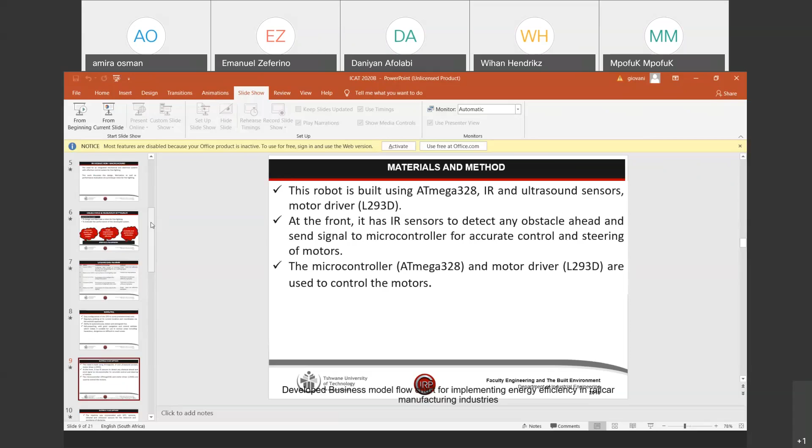Particularly, the machine was incorporated with some cameras, and the control system, basically, comprises the Arduino microcontroller, which controls the two geared motors alternately in order to control the direction of the motor. And the programming was done using C program instructions fed into the microcontroller.

We designed a robot that is able to independently identify and extinguish flame in less than 5 minutes and return to its initial position in less than 2 minutes after carrying out the work.

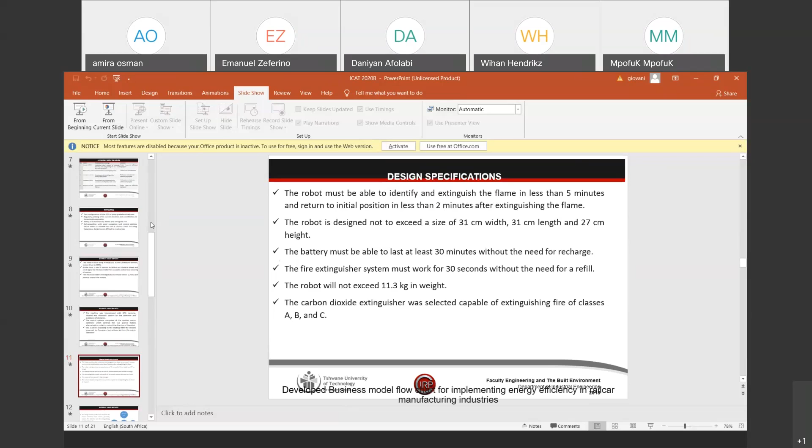We designed a robot whose battery will be able to last for 30 minutes without need for recharge. We designed a robot whose fire extinguishing system can work for 30 seconds without the need for a refill, and that is capable of extinguishing fire belonging to the A, B, and C categories.

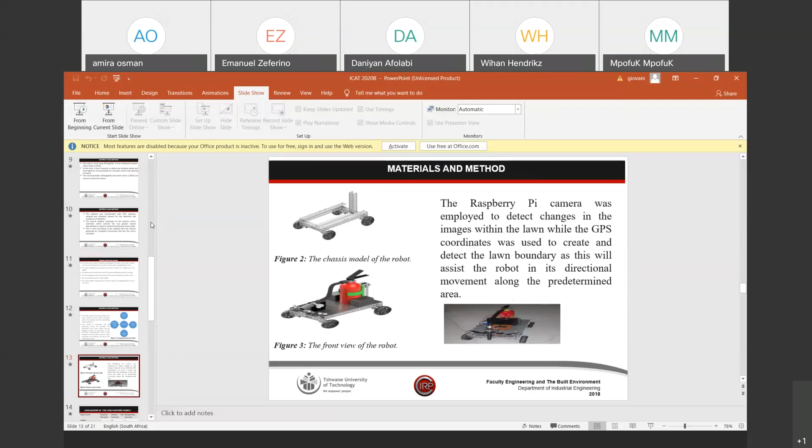We also incorporated a Raspberry Pi camera that is able to detect changes in the images captured in the lawn in which the robot is permitted to move, while the coordinates were used to create and detect the lawn boundary, as well as to assist the robot in its directional movement in the predetermined area.

Now to the performance evaluation of the robot. The robot demonstrated excellent navigation and obstacle avoidance abilities when approaching the flame source, and in line with the design requirements, it could keep a safe distance of about 0.5 to 1 meter, depending on the intensity of the flame. The table shows the evaluation of the capacity of the robot in terms of detection time, distance from flame, and the time for fire extinguishing.

From the table, it was observed that the detection time decreases with higher intensity of the flame—the higher the intensity, the faster the detection time and response of the robot. This is due to the fact that the threshold value for flame detection is first preset on the microcontroller, which forms the basis for the activation of the extinguishing module.

On the other hand, the extinguishing time was observed to increase as the intensity of the flame increases. The intensity of the candle flame—the flame source belonging to the B category—at a distance of 0.5 meter was less than the threshold for flame intensity, and hence there was no basis for flame extinguishing. That's why we have 0 there.

And the fuel in the kerosene stove was made to overflow before the extinguisher could detect the presence of flame, after 20 seconds, thereby taking a total of 15 seconds before the flame could be extinguished.

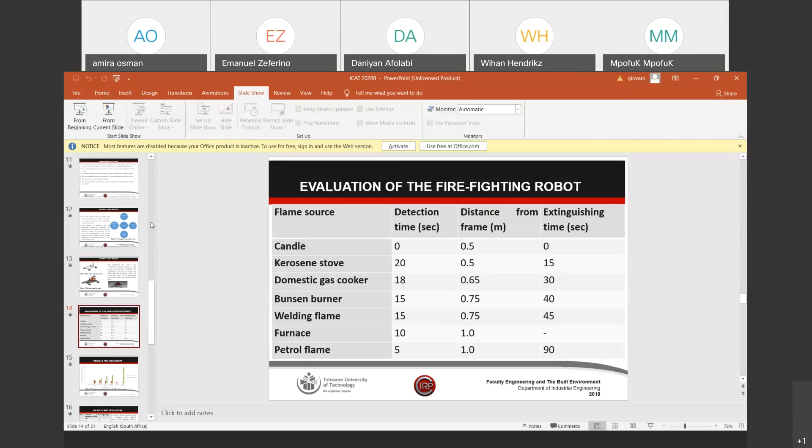Thank you. So the results also obtained for the robot indicate that the robot will capture images of the scene for further control action, and at the same time avoid obstacles. It has the capability to make a 180-degree turn.

Hence, this work provided a self-governing, independent robot for firefighting operations. Just like I've said, this is the image showing the obstacle detection and avoidance capability, as well as the angle of turn for the robot.

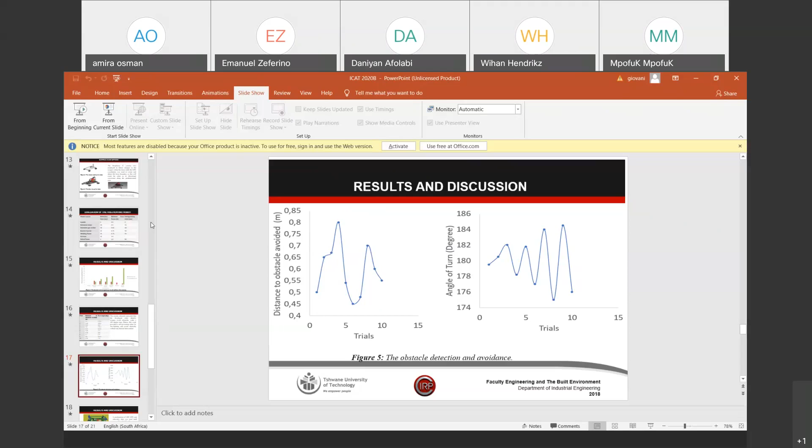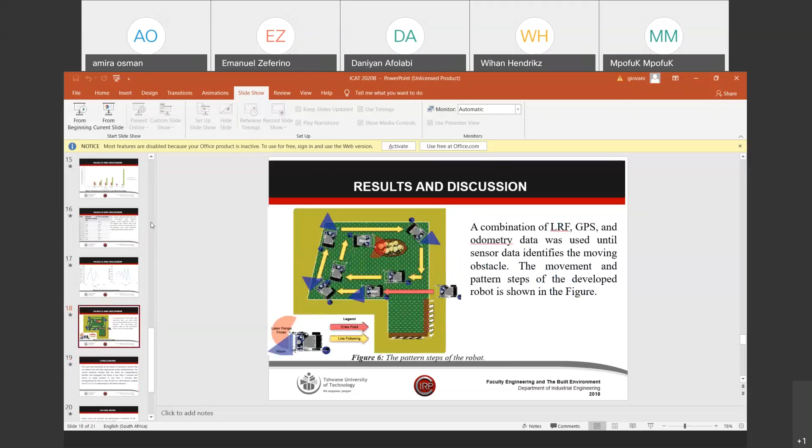Data was used until the sensor data identified the movement of the obstacle. The figure here presents the pattern steps of the robot, and you could see that the steps of the robots are well related.

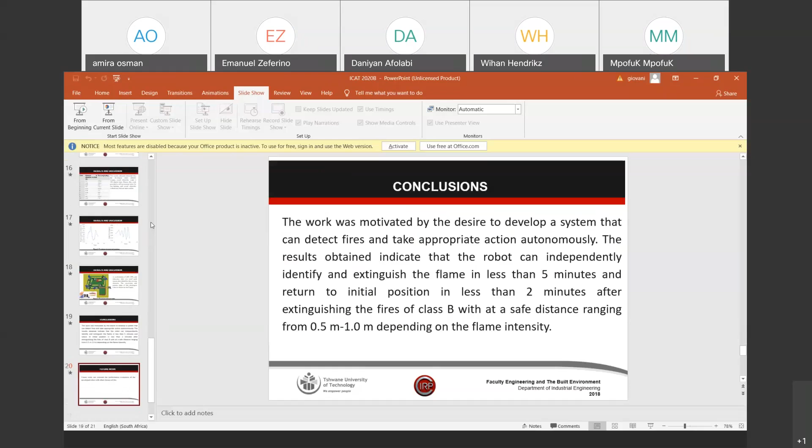In conclusion, the work was motivated by the desire to develop an autonomous system for fire detection and extinguishing. The results obtained indicated that the robot can automatically identify and extinguish fire in less than 5 minutes and return to its initial position in less than 2 minutes. Future work can consider performance evaluation of other classes of fire flame that have been identified. Thank you very much.

Wonderful, thank you so much. What an incredibly worthwhile project to work on, Dr. Daniyan. Thank you so much.